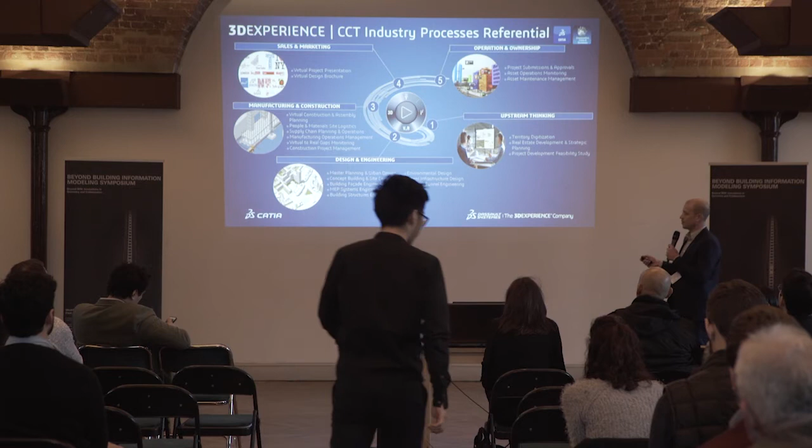We think of these roles within processes, and these processes are what people or departments do on a daily basis. You can see we've got urban planning, concept building design, facade engineering, environmental design, linear infrastructure, bridge and tunnel—these are CATIA-focused processes. Some of the others are separated by brands and industries, et cetera, but largely these are our main roles here for CATIA for construction.

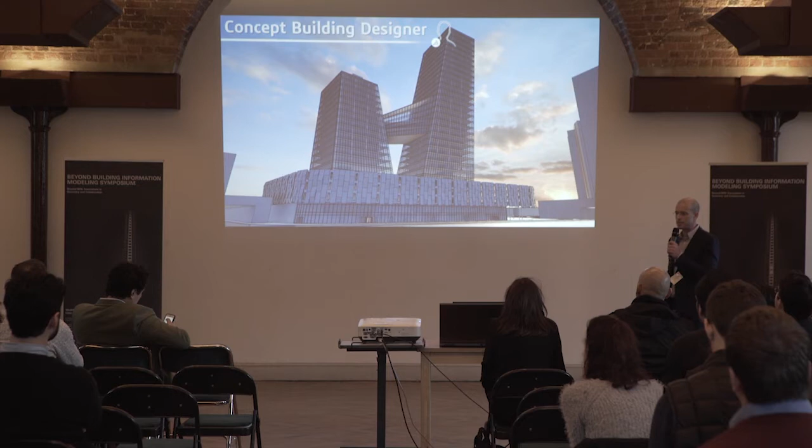The concept building designer—this role contains a number of applications to do conceptual design. This is Imagine and Shape. We're going to talk about this Thursday morning for the workshop, on how to do conceptual subdivision surface modeling. It's an intuitive interface to work with.

You can do, as you see here, rectilinear modeling, and you can do subdivision modeling. I think Michael's video is actually a lot better than mine, but this is just how to do building massing for what would be two tower projects with eventually a little bridge connection between them. So on Thursday morning, we'll spend a couple of hours doing Imagine and Shape.

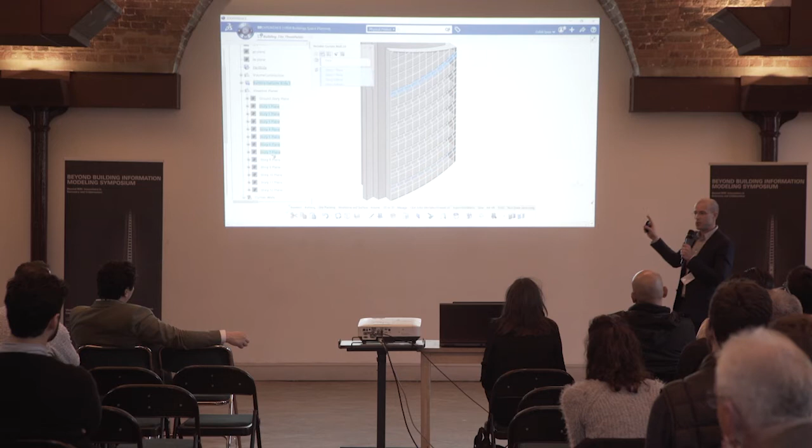Michael showed building space planning as well, a new functionality that came out just over this weekend. It's the variable curtain wall—this is a brand new command that allows you to do conceptual facade design. Paul, you should check this out, because we've included an extract cells functionality that takes this conceptual design model and outputs all of those surfaces for the setouts with attributes for each panel.

Because I spent years and years doing facade design with CATIA, writing custom scripts to do the panelization, I worked very closely with the R&D team to develop the functionality for this command so that you can eliminate all of that tedious scripting.

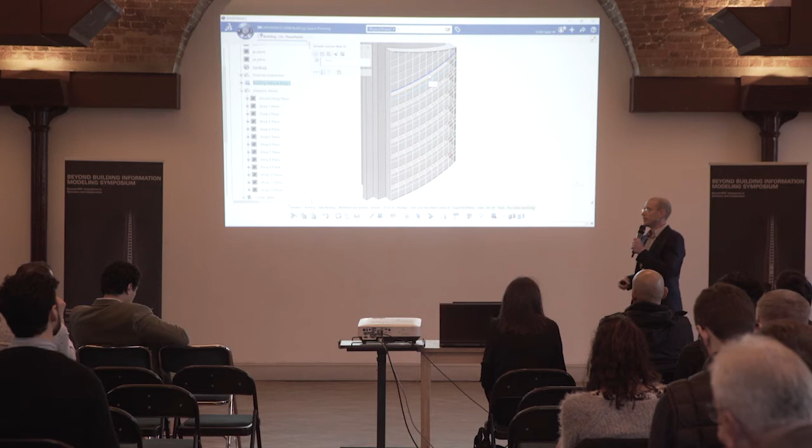What's great about it is you can design one region or multiple regions, you can create these bands, and then you can take that pattern and apply it to a different face. So it greatly simplifies and reduces the amount of work you have to do once you get one design right, and then you've got to work on another face. This is going to make it all the more easier.

And because we've linked this to the detailed-oriented roles with engineering, the digital continuity from the conceptual model to the detailed model remains intact. So one last time we'll show the match, because that's where the magic happens. Here you say select my previously designed one, and there you've replicated your design.

Another thing that's really exciting for us is component-based design. This is a technology that we've worked on for a number of years that's really being refined and put to use now to connect the conceptual designers to the detail-oriented engineers.

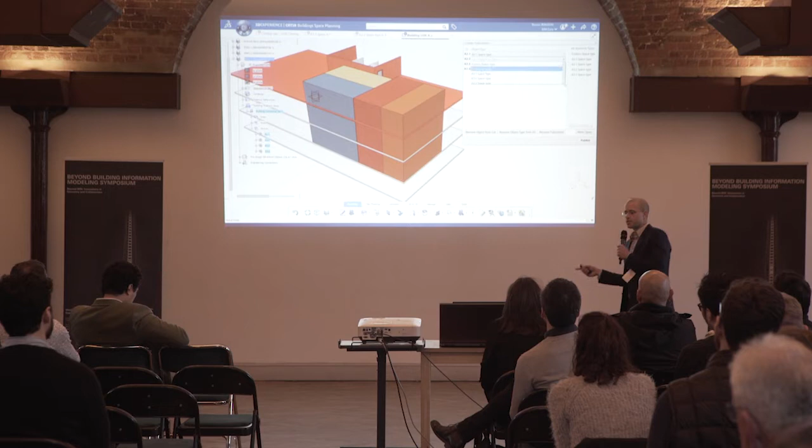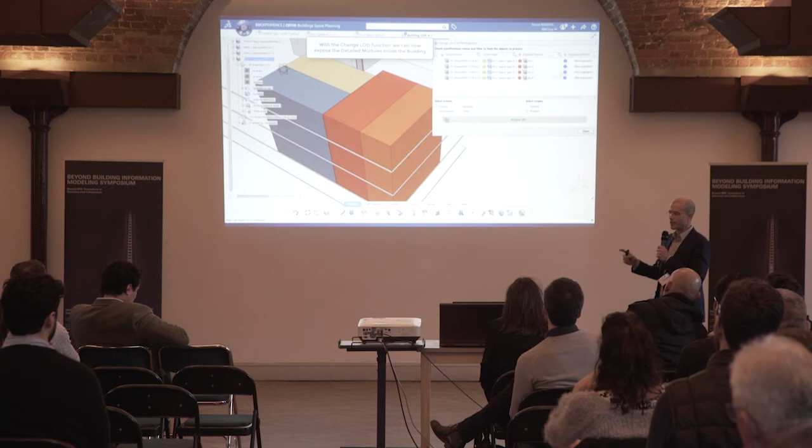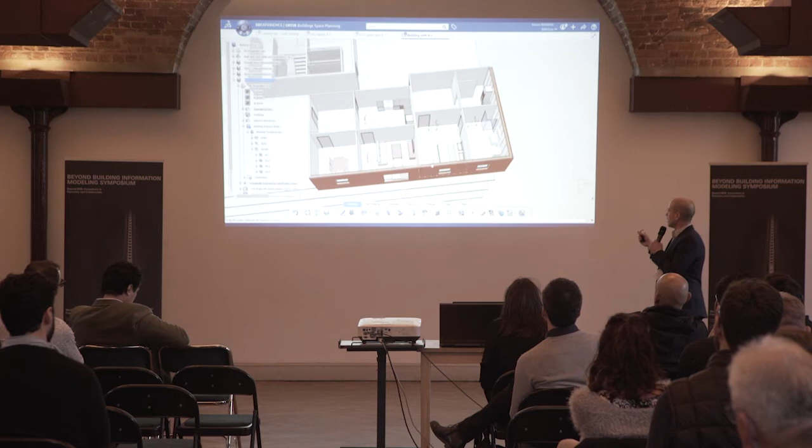So here, through the use of engineering templates, you can link a volumetric model to a detailed engineering template, and with the click of a button that we call change LOD, you can automatically instantiate those detailed templates that could represent units or prefabricated modules. Here you see we've automatically instantiated units that have been developed by another engineering team, another design team, that represent modules or apartment units.

Those are preset and come from a catalog, but they can be parametric as well. So here the designer is going to make a parametric volume, get the shape somewhere where they want it, and then associate that volume to an object type that's a parametric washroom.

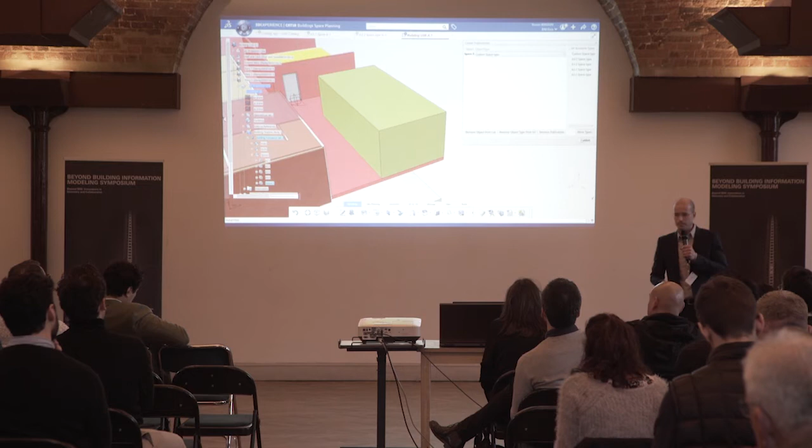So the washroom is going to include all the information that you would need to fabricate that, and it's because the 3D Experience is on the cloud and it shares a database for all project participants. The information that's contained in this washroom is saved to our database, and then it can be accessed anywhere, anytime through the dashboard or through the other project participants who are participating in the project.

So now the designer is going to say, well, I need to change the shape of this volume to meet new design requirements. I'll commit that, and the model will automatically update. And you saw before the attributes of that pipe, the length of that pipe is listed here, and now, because it's all parametric, that's all going to update.

And the designer can continue going on manipulating their volumes and adapting their design, and those components are going to keep updating.

Where that can go, well, here's an example of a parametric bathroom pod, and these can be predefined modules or preconceived modules that are then updating automatically as the designer is tweaking, manipulating their design. These parametric pods, these bathroom pods, can update.

And it can be taken further, all the way up to a detailed assembly for an apartment unit. This is a small studio that contains that bathroom pod. So we're starting to nest these intelligent components, these parametric components, into the model. And we can include fabrication constraints and fabrication requirements into the model as well.

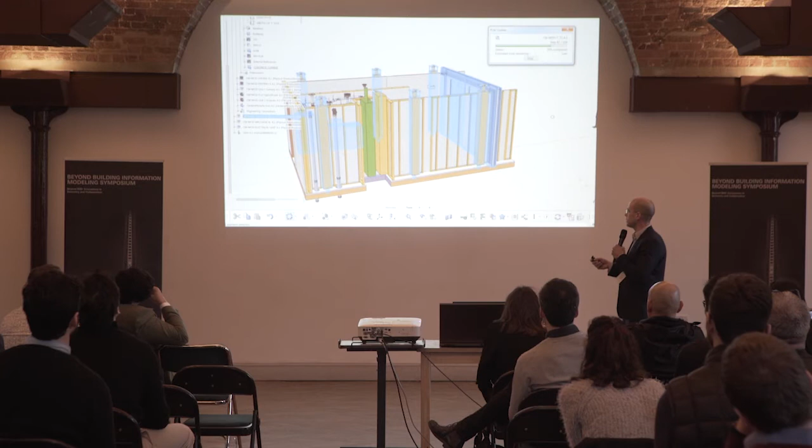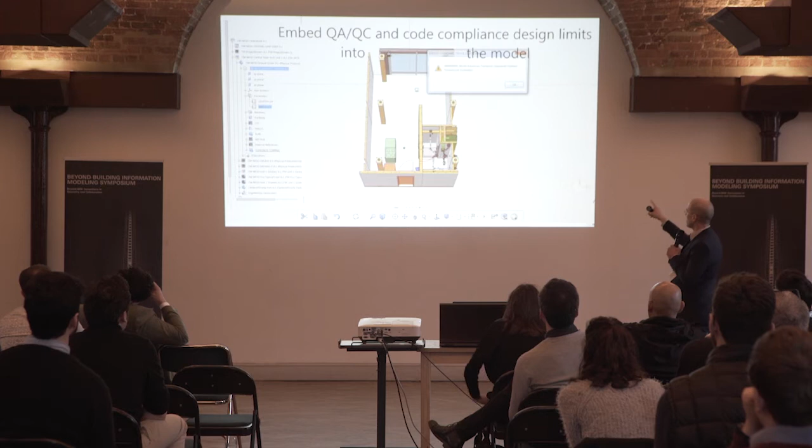So we see as we start to change the layout of this unit, say we want to make it wider, so we'll go up to 17 feet, we can embed manufacturing rules saying now we've exceeded the North American trailer sizes for this unit. It's not fabricatable this way, or it's not deliverable in this way anymore. But we can choose to ignore that if we want.

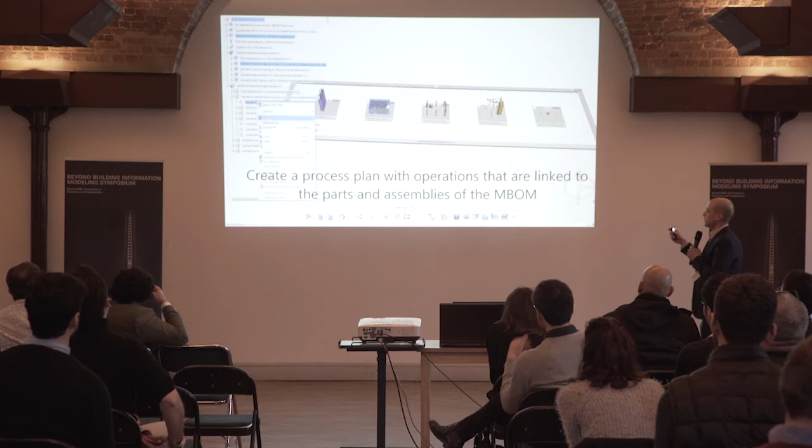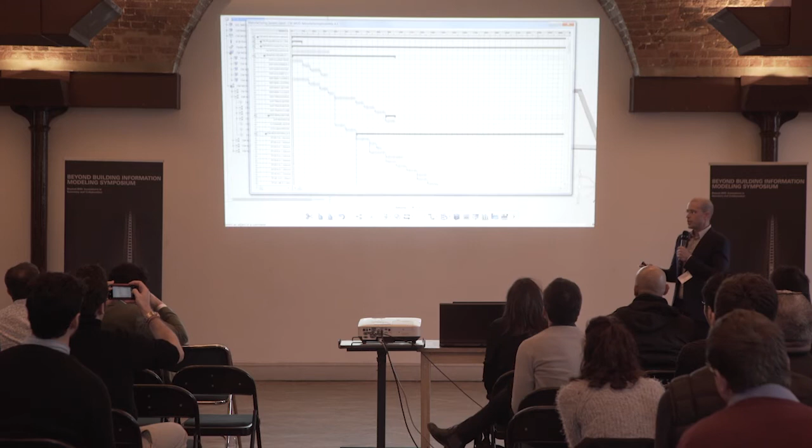All of that same information can be opened up in Delmia, a sister application on the 3D Experience platform, and there we can do our manufacturing bill of materials. We can just define our process planning. We can say we're going to associate not only cost but time to each one of these elements. We can visualize that in the Gantt chart, and then we can take all of that information and run it through process planning and simulation to go up and do our 4D simulation for installation.

So we've seen now our aim is to industrialize the construction process, and say that we can go from a conceptual design model, using these components that have been fully vetted out for manufacturing, into an industrialized setting for manufacturing, delivery, construction.

At any time you can pause this simulation, you can go in and do your measurements, and continue on.

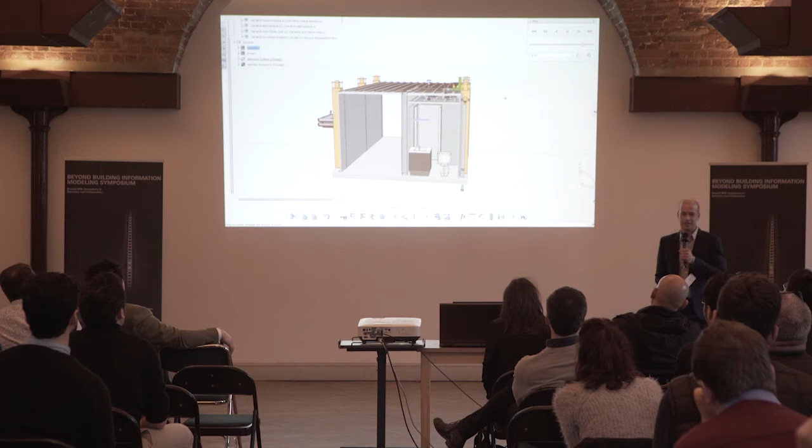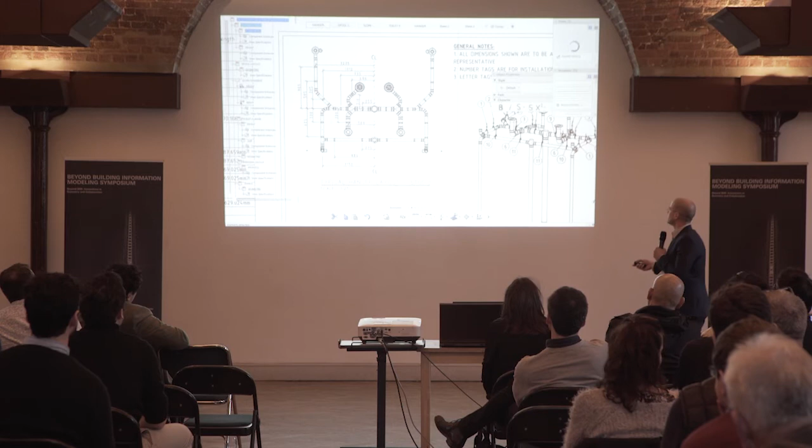Even though the 3D Experience platform in CATIA, we're the 3D Experience company, we don't like to do drawings. We know it's a reality in most of our lives, so we've built in a drafting workbench and we continue to improve it, even though it's not something we really like to focus on. As part of R&D, I don't wake up in the morning wanting to make drawings better. I'd rather work on some of the more interesting projects you'll see coming up after this.

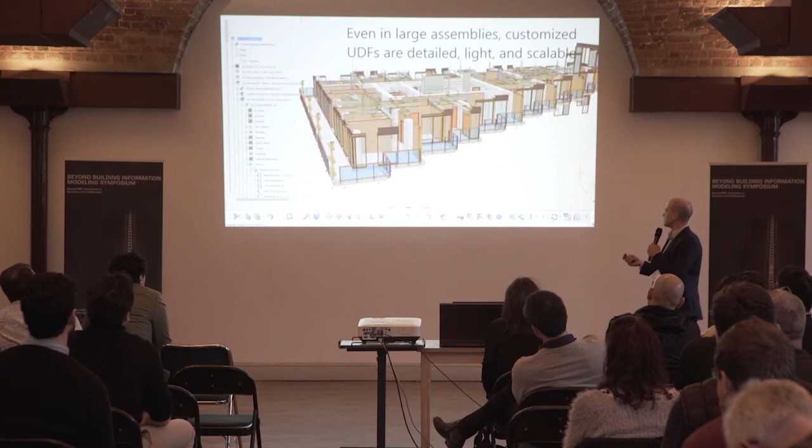This is all 2D information for assembly. You can do your architectural layout drawings, but the real heart of all of this is that it comes from a 3D model, and the 3D model is almost infinitely scalable. You can build these models to massive scale at a very high level of detail. A Revit model at LOD 400 blows my mind, but LOD 450 in CATIA doesn't seem to be much of a problem.

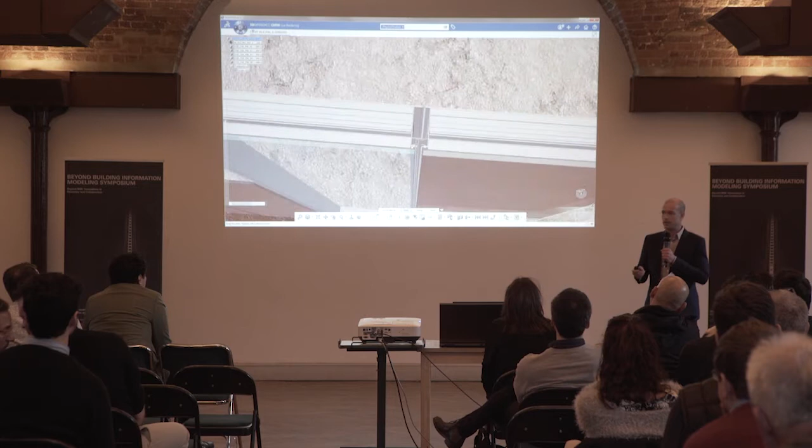Here's the architectural detail designer role. This is where you're going to be building solid models for manufacturing. This is an example of a facade, a larger assembly, a 5-panel assembly, that gets referenced into a conceptual model that was done with xGenerative design.

For this example, we're going to do a simple assembly pattern which will automatically instantiate that same 5-panel unit around the building to do simulations for installations, etc. This isn't really managing any of those eccentric, non-typical conditions, but it's showing the power of instantiating that many panels into one model.

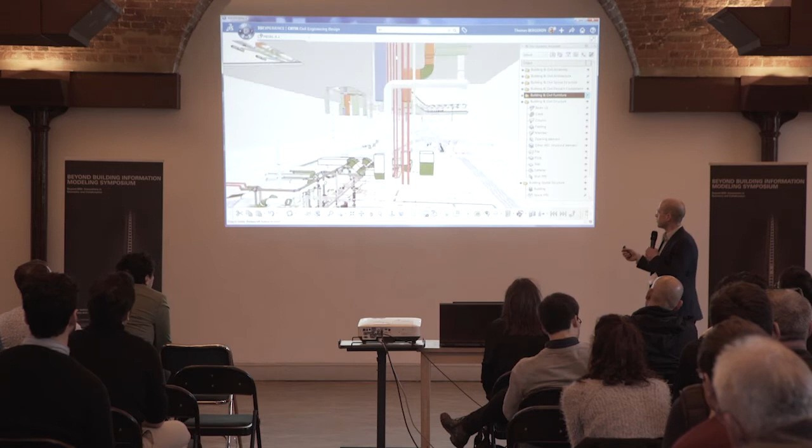The 3D MEP designer is for mechanical, electrical, and plumbing. The great thing about CATIA is that you can embed specifications for parts as well into your model. This isn't just geometry, this is information—information within the context of a larger building.

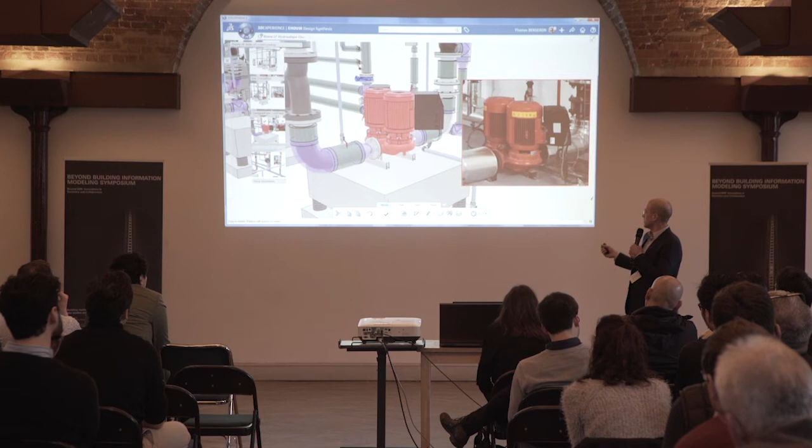This is actually the mechanical systems for our metal building. We modeled our 5th building on our campus in Vélizy. This is an example showing the design review between the as-built and the as-designed condition.

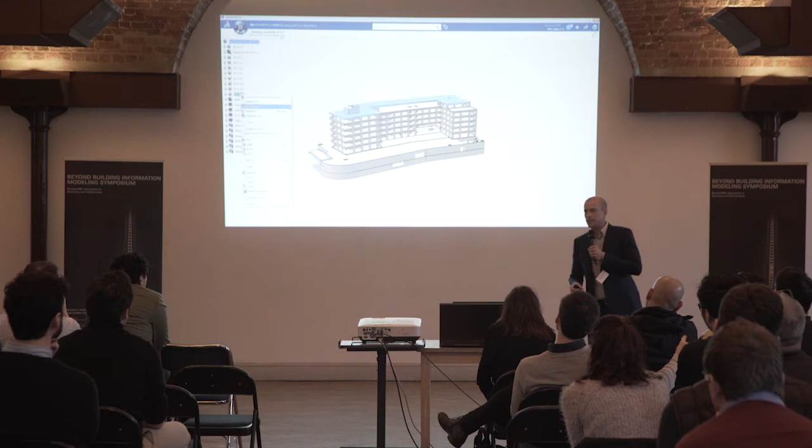Building structures designer. The building structures designer is for conceptual and detailed design of concrete and steel structures. Here you see again the metal building from our campus. We've recently released a new rebar application to do concrete structures.

Here you see the interface of how you can adapt—you can use preset bar configurations and bar types that come with the software. You can manipulate the patterns, and then you can design within the context of the building to identify clashes, eliminate clashes, etc. I'll skip through this because I'd prefer to talk about xGenerative design and the new 3D generative innovator role.

This is a role that was released back in November. We kept it hush-hush for a couple of years because we've been working on it for a long time. I think I was here a year ago where we talked about this to a smaller group of Zaha Hadid people. What is it?

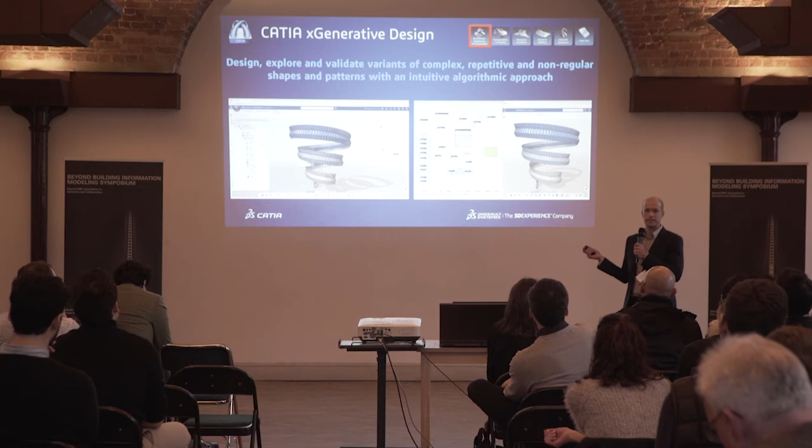It's a new web application to do generative modeling. You can do either the graphical scripting that everybody knows and loves and is very fond of, or you can do the same type of modeling through a dialog box. This is what we're going to spend most of the day on tomorrow in the workshop.

What is xGenerative design? Well, it's one application that lives among the ecosystem of other applications connected through the same common data environment of the 3D Experience platform. But it's a revolutionary product because it bridges the gap between an advanced user and a beginner user.

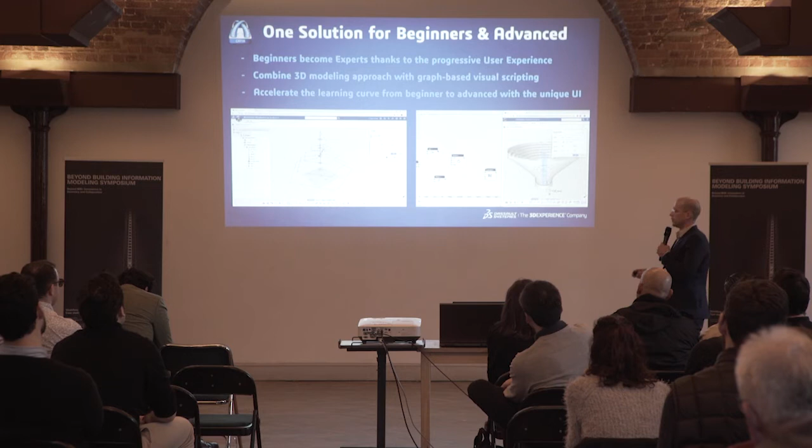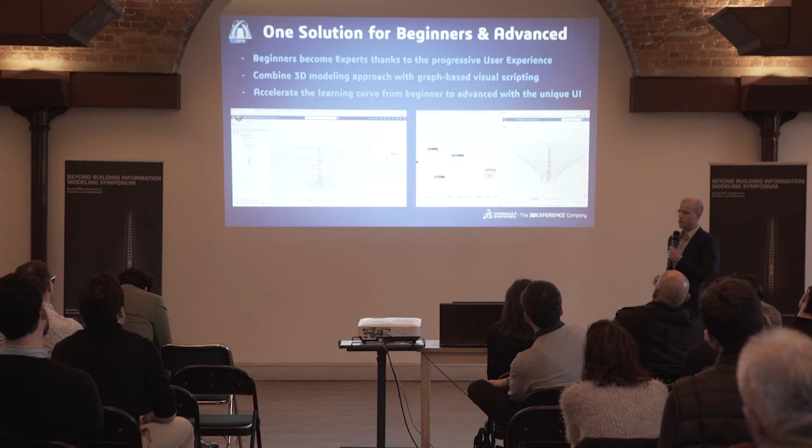So at any point, if you don't want to get into graphical or generative modeling, you can use the dialog boxes. You can model traditionally as you would any other 3D modeler. Or if you're an advanced user starting to explore the application and get into those more advanced stages, you can open the graphical scripting window and start adding additional logic, making more comprehensive, more sophisticated scripts.

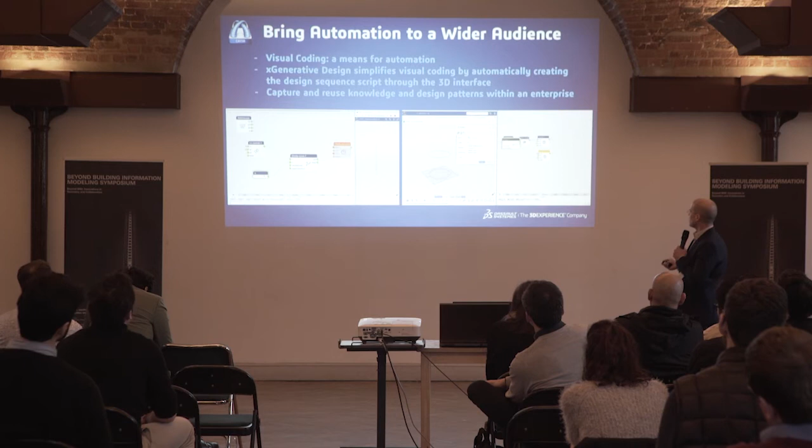One of my colleagues likes to say it's coding without the code, because you can do this generative modeling without actually getting in and writing any scripting or graphical scripting if you don't want to. This video is interesting because it shows one of the main functionalities: if you want to model in 3D and you have the graph open on the side, you see we build that graph for you. Even if the graphical scripting window isn't open, you're modeling on the web in a dashboard interactively with geometry. It's creating this graphical script for you in the background. If you want to open that window, you can do that and you can start to model.

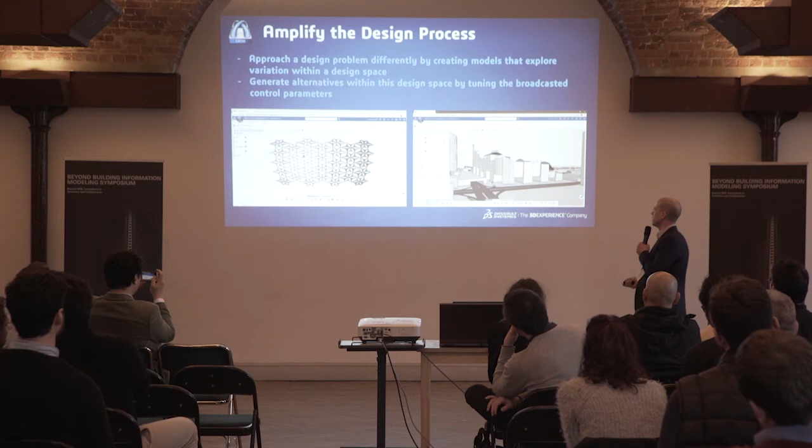We also have what we call the controller panel. If you're a senior designer, if you didn't build the model but you want to share your model with somebody, you can send them to the dashboard. They can open up the controller panel and start to model or play with your parameters to explore the design space within which the designer has created their model. So now you're not designing for a specific product or design case, you're designing for a design space, to explore a design space, which opens up the world of possibilities into a more open, more creative process.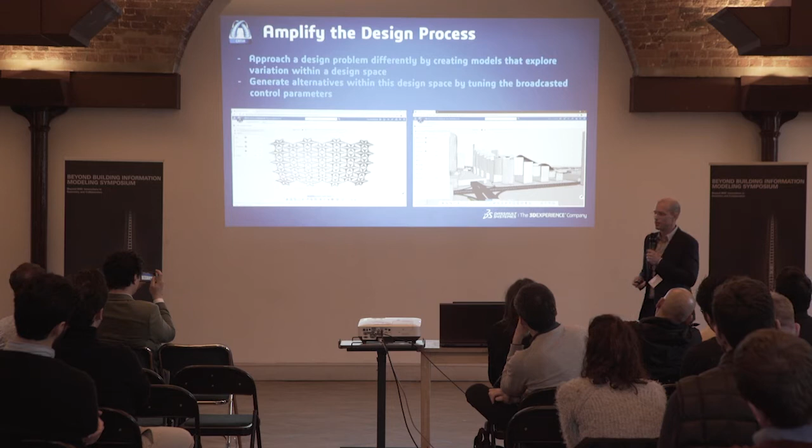And what can you do with that? Well, we can start to link our new web applications together. This is an example of urban planning, urban design. This was a video from Nicolas Senemo, who's right here in the audience. He's going to be leading the session tomorrow on xGenerative design. You can model this little neighborhood condition where you have the fringe, you have the interior core, you have all of your parameters organized into regions. This region right here has been collapsed, but that's where all the computation is happening for this zone.

When he modifies the parameter over there, it's going to update the geometry. It's outputting a number of values here so that you're modeling with data as well. You're capturing that data, those KPIs, that can be measured against each other. And that same model is represented in 3D Experience City, which is our city environment for exploring regions, territories for larger administrations or public entities, or educational institutions, people with larger campuses that want to manage more data than, say, an individual building.

xGenerative design, because it's a part of CATIA and it's a part of the 3D Experience platform, shares the same database. So these are three examples showing the digital continuity between a conceptual generative model and a traditional CATIA workflow, where in this video we're showing how to do a feature wall. You start in CATIA, the rich client, you go to xGenerative design, you start to model a feature wall, you save it in the database, and then you can refresh your CATIA model, and it reflects that change.

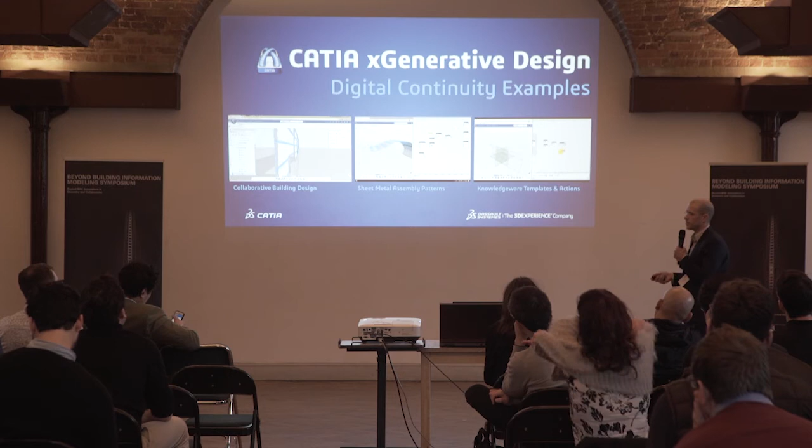This is an example of starting in xDesign, which is another web application that was released a year or so ago, with xGenerative design, and then we do a sheet metal assembly pattern. And then this is an example of taking a template-based approach where you create a triangulation pattern and an engineering template for a facade and instantiate that using traditional knowledgeware from CATIA.

These videos are all online on our YouTube webpage. I show this example because it's local, right? The Floral Street Bridge. It's also one of the first digital project tutorials, which was CATIA V5, that I did when I was learning CATIA. It's also one of the first tutorials that I taught when I was a professor. And this example, to model this in CATIA, or Digital Project, was a 3, 4, or 5 hour task.

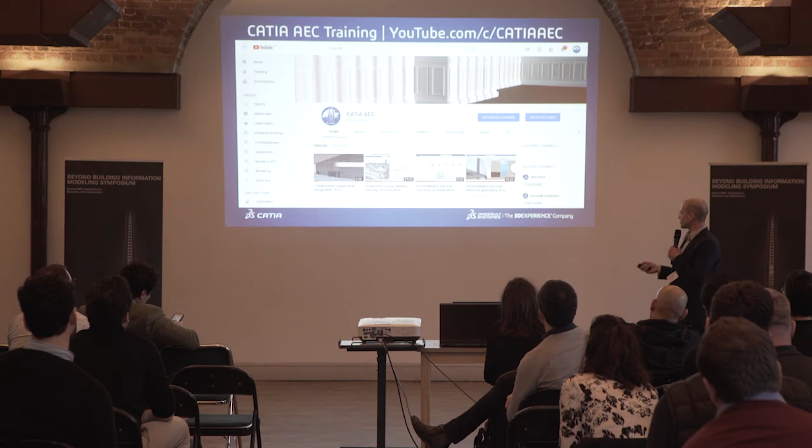And with xGenerative design, it is maybe a 3, 4, or 5 minute task. So the difference in process and the difference in performance is phenomenal. Again, I said all of those videos are on our YouTube page, so if you want to check it out, shameless plug. And xGenerative design then, so what is it?

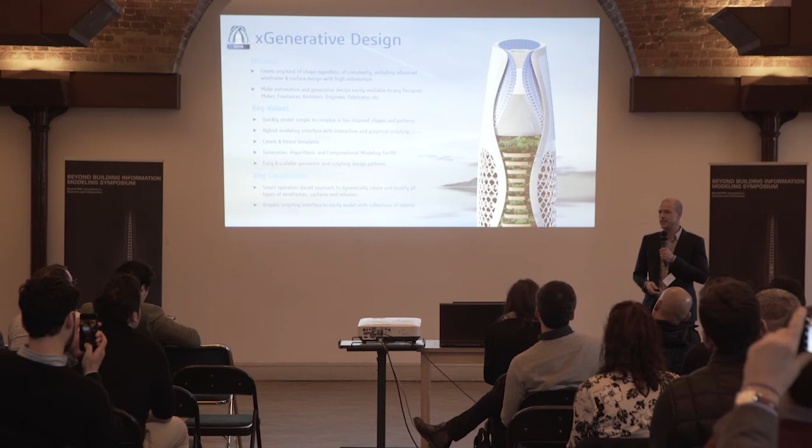It's this graphical scripting parametric modeler that's a part of CATIA, that is really going to extend and become a backbone of our future solutions. Which leads us into where we're going in the future. I'm a part of R&D, so I get to deal with our developers on a daily basis.

I share the vision of the industrial leaders to say, where are we going to go and how are we going to get there? So one of the big things we've talked about is this fourth industrial revolution with cyber physical systems and a new reality of augmented and virtual reality.

One thing we're working on as an industry disruptor is one seamless platform for submissions and approvals so we can eliminate paper and go fully digital. We address what we call the ABCs of the industry: the administrations, the businesses, and the citizens. So how can all of those people interact on the same platform to extend a project from each one of those entities?

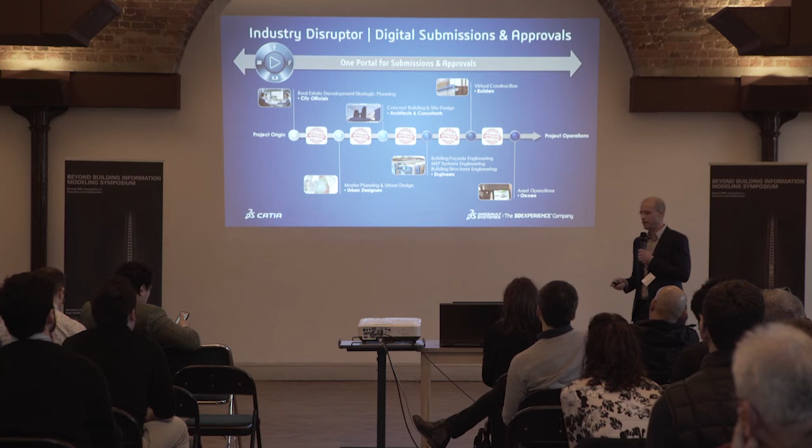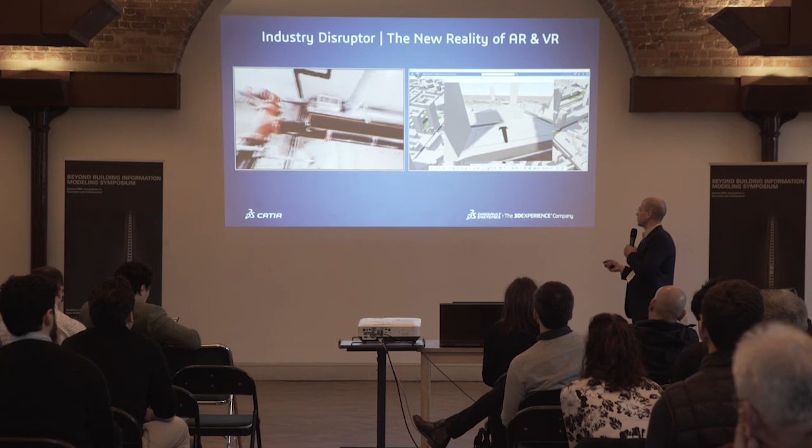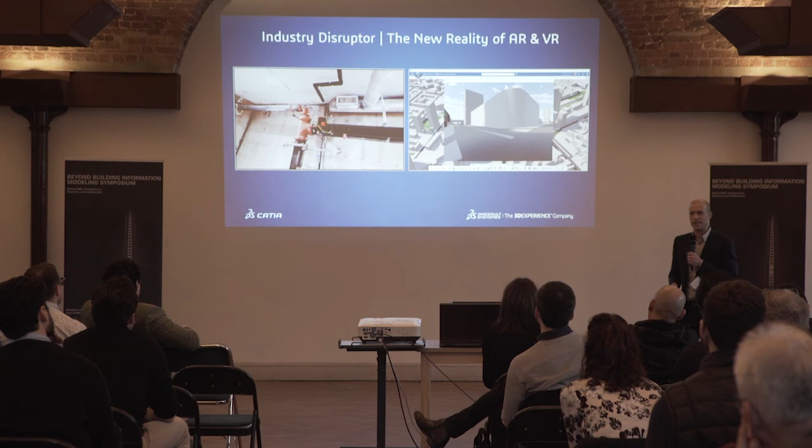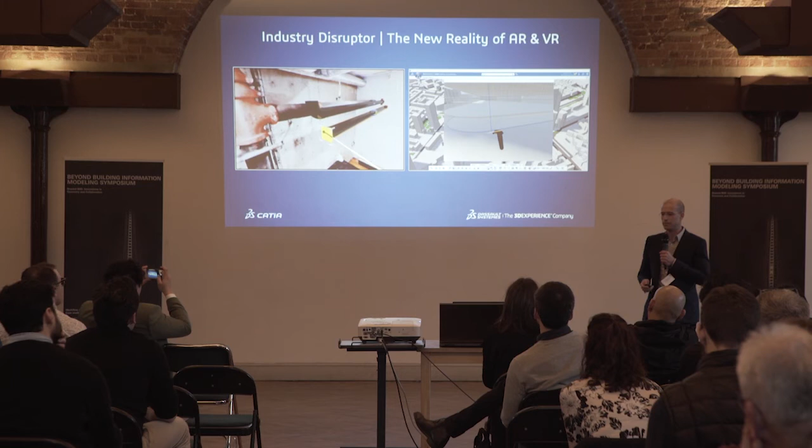As a service. Another thing is the new reality, so augmented reality and virtual reality. These are two R&D projects: on the left-hand side, we're modeling within the context of a point cloud scan, so it's not really augmented reality, it's a mixture of virtual and augmented reality. On the right, another R&D project of modeling with virtual reality. This is the building scale, but the first hint at the future—our first offering will probably be more at the urban scale than the building scale.

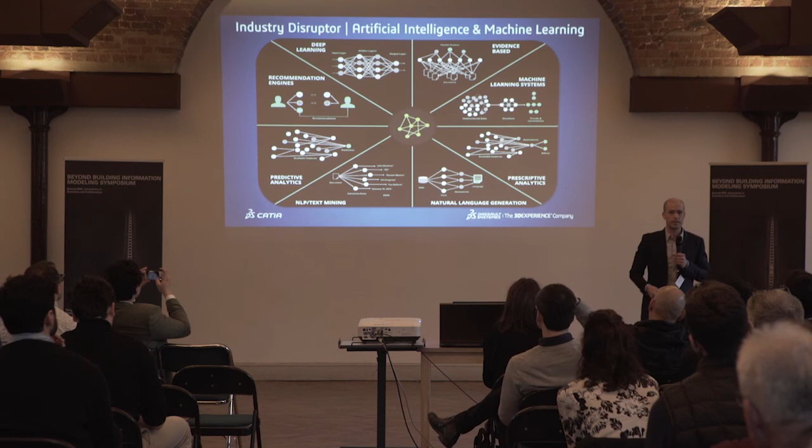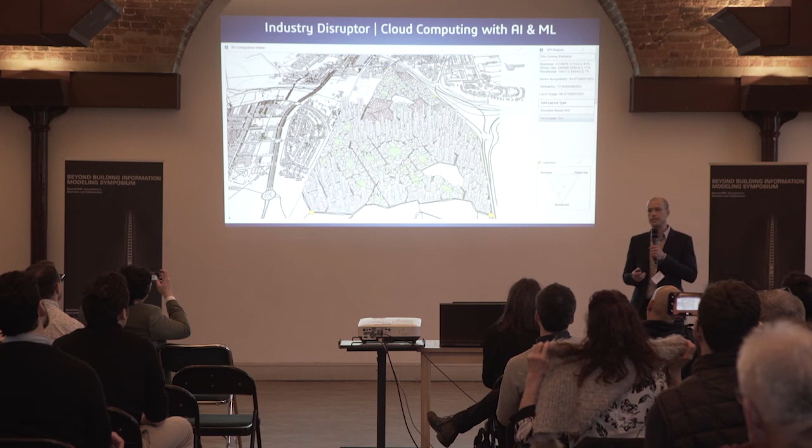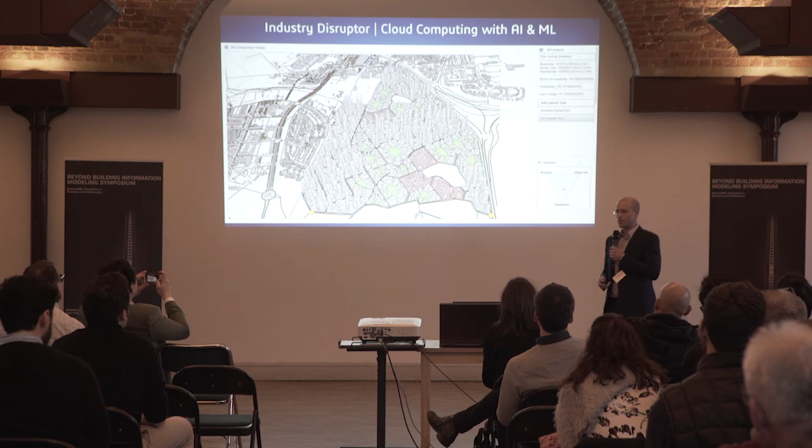Artificial intelligence and machine learning—this is big on everybody's mind within the software industry, and it's big on our mind too. We're combining that with cloud computing. So how can we take cloud computing with our xGenerative design solution, mix that with artificial intelligence and machine learning, to build these new breeds of software that provide design guidance and design assistance, and automate those processes by extending the capacity of the designer, not overtaking them, but extending their capacities.

And finally, every year we hold a hackathon at the Milan Design Week. This year we're holding our hackathon on what I'm coining datavironments, which gets on the topic that Filippo started with at the beginning of the day.

Within the last two years, we've generated more than 90% of the world's data. It's really hard to believe, but that's a shocking statistic. Between the amount of photos, Facebook, Instagram, and all of that, our data is exponentially growing. I love the video that Filippo showed this morning on that future data-centric city. So the hackathon we're having this year in Milan is taking our web applications and creating this vision of what is this data environment that we're creating, and the future of our society and our culture.

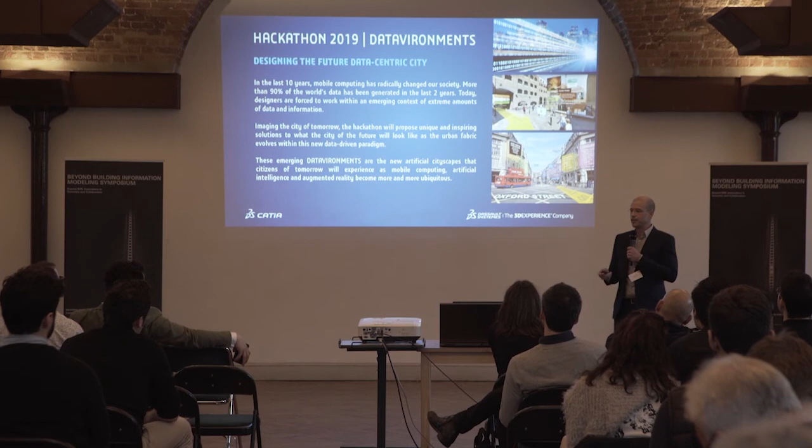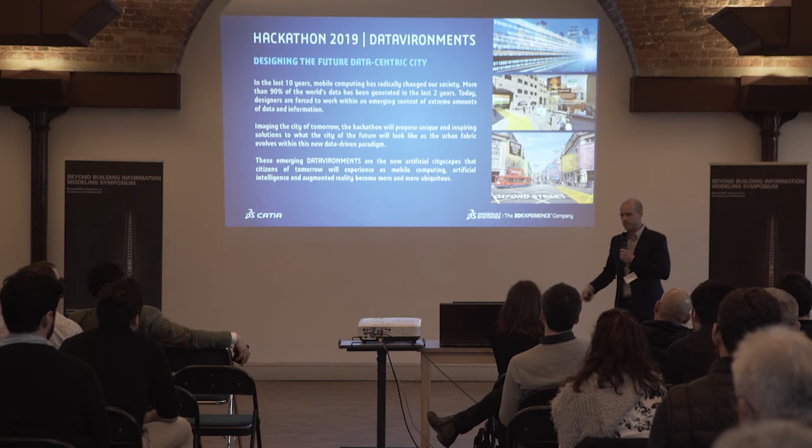That's the very beginning of our thought process towards where we're going in the future with software for design, engineering, and construction. And that's it. So it's the end of the day. We'll end it there.